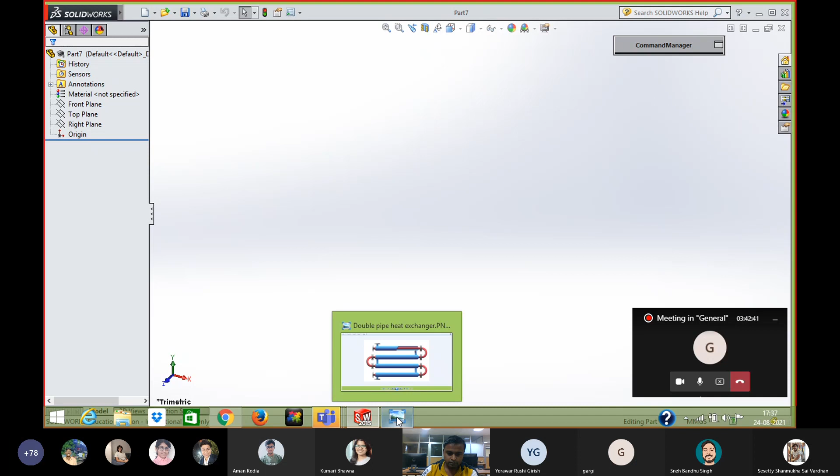So I think this is an example of a double pipe heat exchanger, isn't it? So this is the inner tube, this is the outer tube or shell.

Actually we can't design long pipelines, that's why we had to use a U-type bend so that we can reduce the area, isn't it? Yes sir, okay that's why. So we have to design this outer shell, the inner tube, and the U-turns or connecting part, that is coupling. So we will learn how to make a model of these 3 or 4 parts.

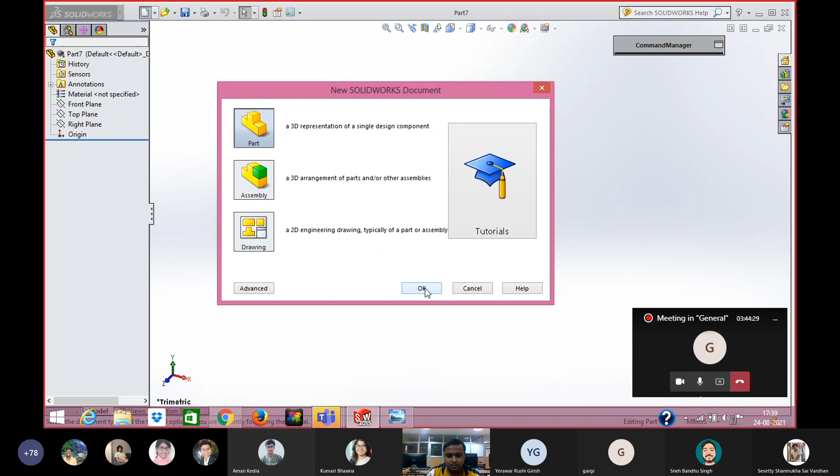From here you can take, for part design you can click on this file page and then select part and OK. So this means you are going to make a part modeling.

Okay, then you have to select a plane. I will select a top plane and then go to the sketch. You just right click on it and then go to the sketch.

So if I want to design a shell, means a cylindrical portion, then what will be its front view and what will be its top view? Anyone can tell? Front view will be a rectangle and the top view will be a circle. You just told the opposite - I mean front view will be a rectangle and top view will be a circle. Okay.

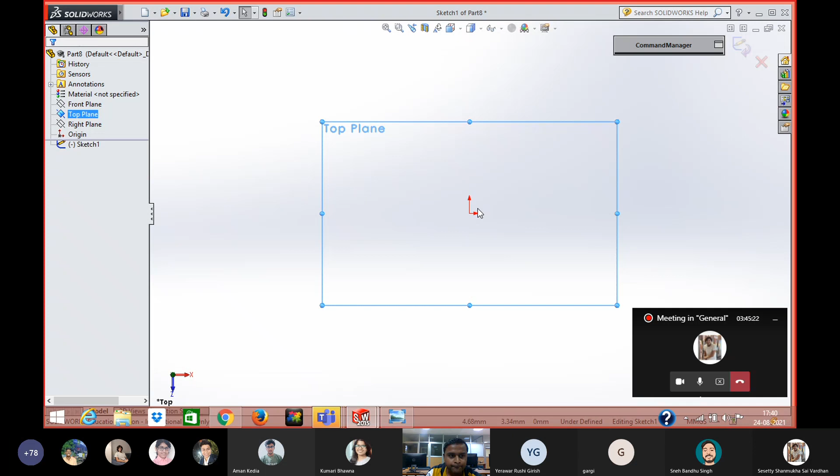So we'll make a circle, or draw a circle. You go to the command manager and then click on the circle, put the center of the circle, and draw it. According to your design of the pipe, you can change the diameter.

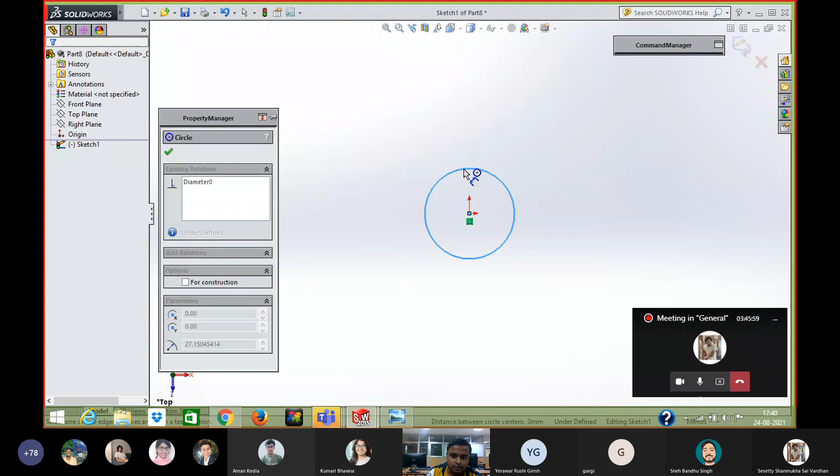Okay, then go to smart dimension. Let's see, here it is showing the radius, so you can also change that. Just go back. Okay, here you can change the radius, or after creating this circle you can also give the other dimension.

Suppose here it's 27.15, you can take it as 30, and then click it. So this is the top view of a cylinder. Then what do we have to do? I have to extrude it. So then just leave this sketch by clicking these options.

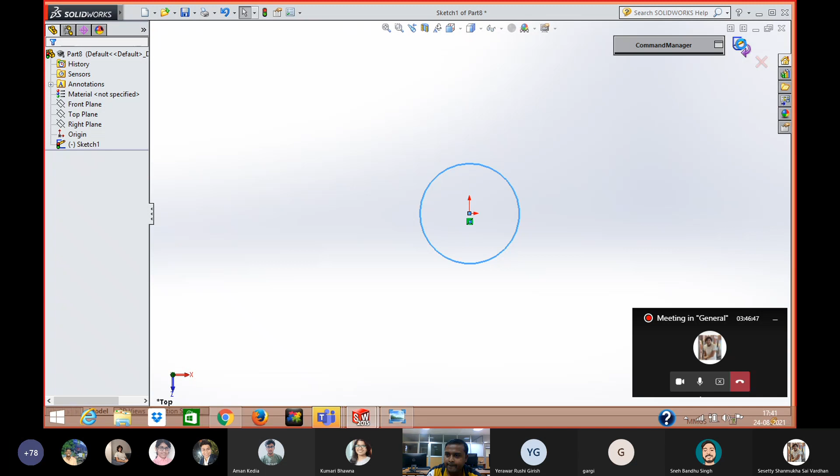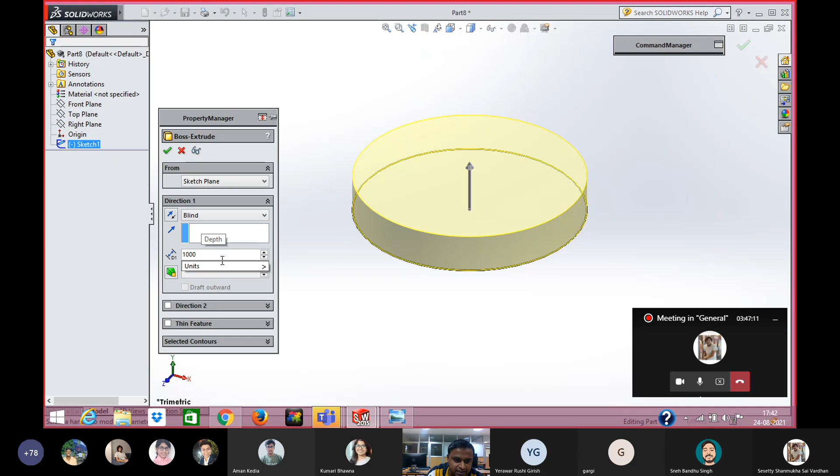And then go to extrude. So whenever you are extruding, it has extruded 10mm. So according to your size of the pipe you can change it. Suppose this is 100 or 1000mm, meaning a 1 meter pipe. So click on it.

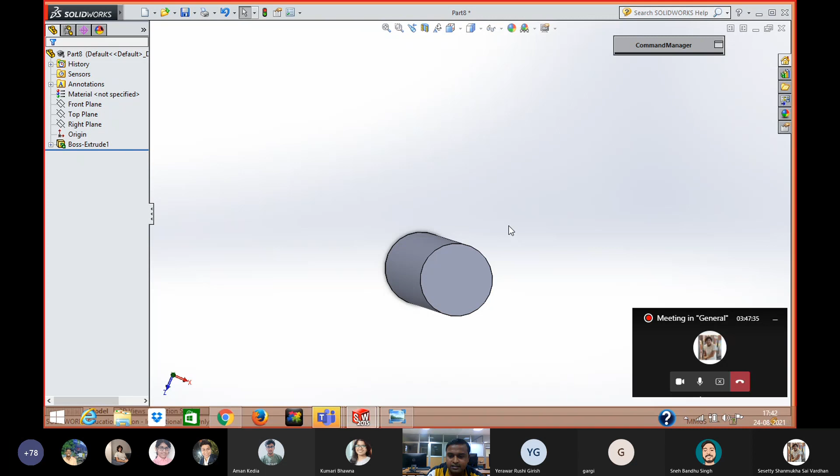So here you see this is a solid, isn't it? This is not a hollow cylinder, this is a solid cylinder. Then how will we make it a hollow cylinder? We will do extrude cut.

Extrude cut where? So then which plane will we select? That circular plane. Okay, then we have to go to the sketch again. Then what will be the thickness of this pipe or cylinder? Accordingly you have to select.

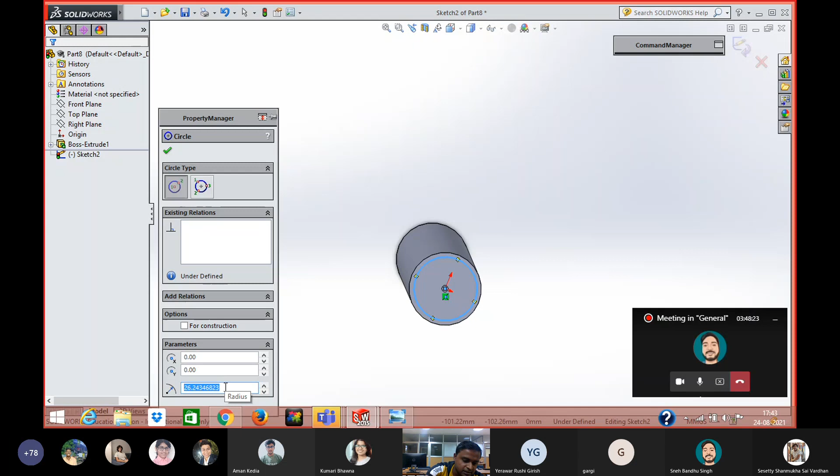Then you leave the sketch and go to extrude cut. So here it is also showing how much we have to extrude cut, so 1000mm, that's why you select them.

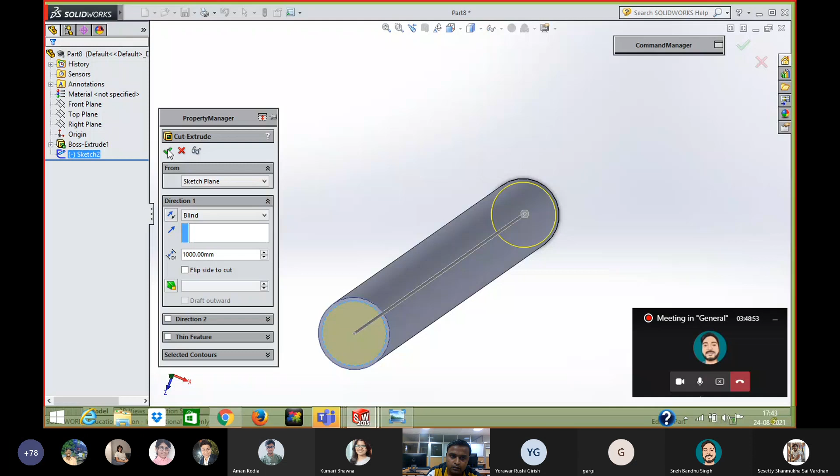So this is a hollow cylinder, isn't it? Yes sir. Then we have already shown that there will be some inlet of that pipe. Okay, how will you create this inlet?

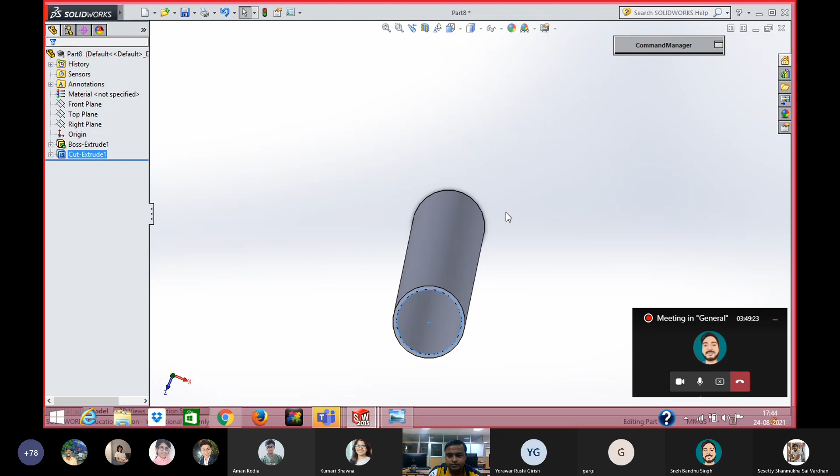Then you have to select another plane on the front side of this cylinder. This is the top plane. Then we have to create an inlet on the front plane of this cylinder, isn't it?

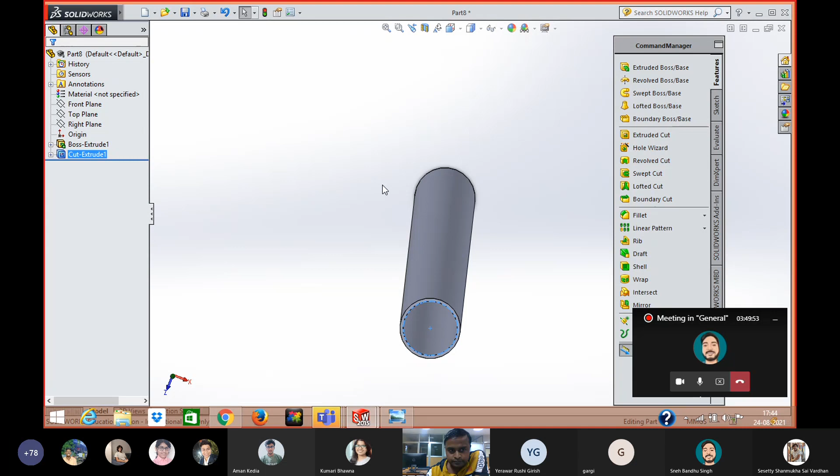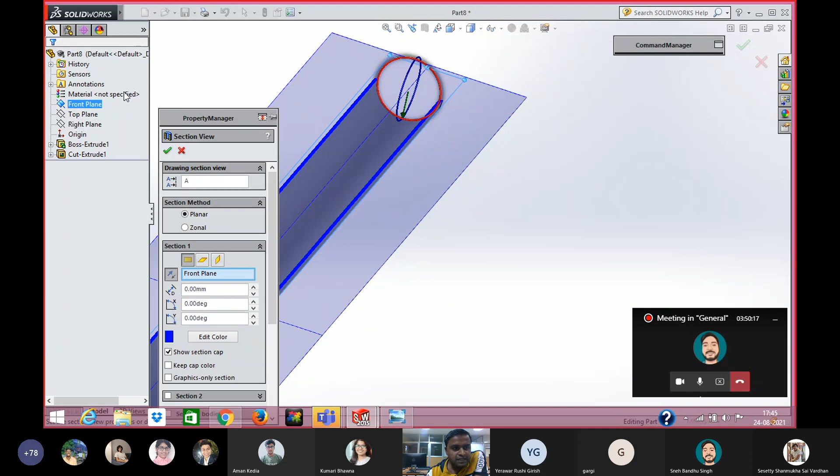Then we have to select a plane. How will you take the new plane to create this inlet? So select a plane, or you can also cut it. In which direction will you cut? See, here it is showing along the length, but you can also change it because we have selected the front plane, that's why it's showing it has been cut along the front side.

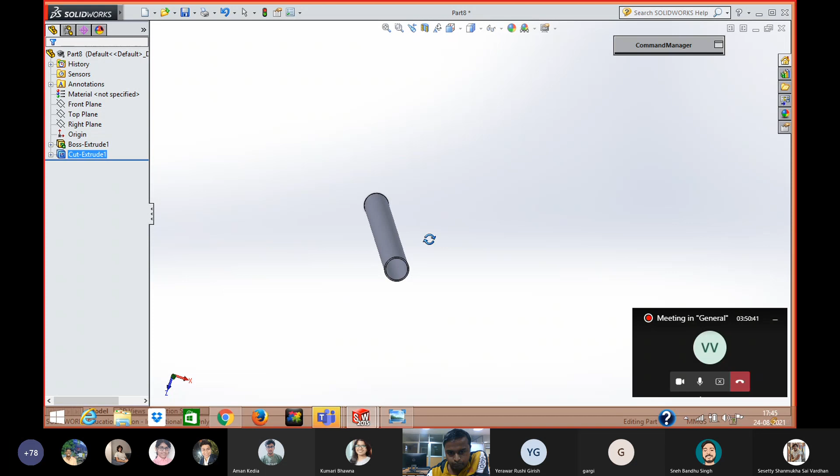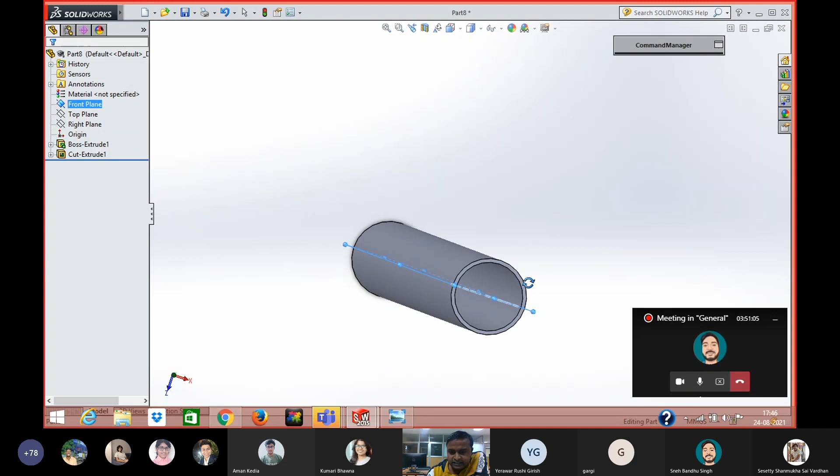Okay, so we'll not select that, we'll draw or create the inlet by another option. This is the top plane, so we can create a front plane. Then we have to just take this front plane onto the upper side of this tube, isn't it? How will we transfer it from the center to its surface?

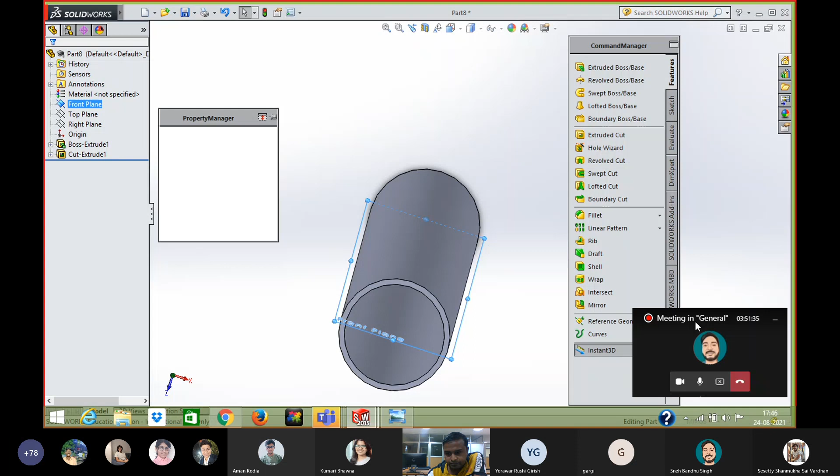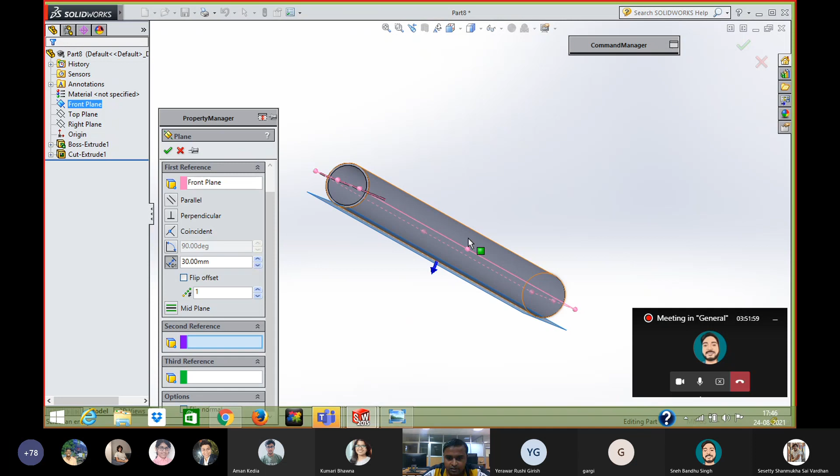You see there is a reference plane. Click on it, take a plane. See, this is the second surface, and you can also take this plane to create the inlet. It's just on the surface of this tube, isn't it? Yes sir.

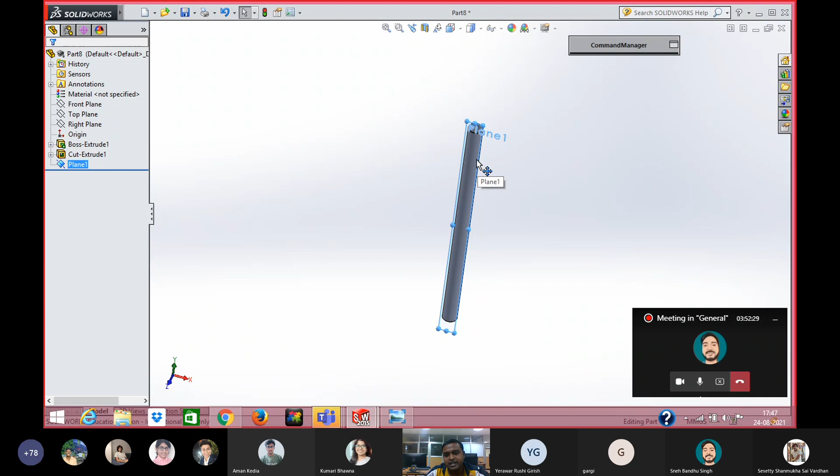So then we select this front plane, and in this direction we have taken - the direction may be changed, but I am not changing the plane. So next go to the sketch. Okay, we have taken this front plane. Then we have to create the inlet just perpendicular to the surface of this tube. Then right click on the front plane and go to its normal direction.

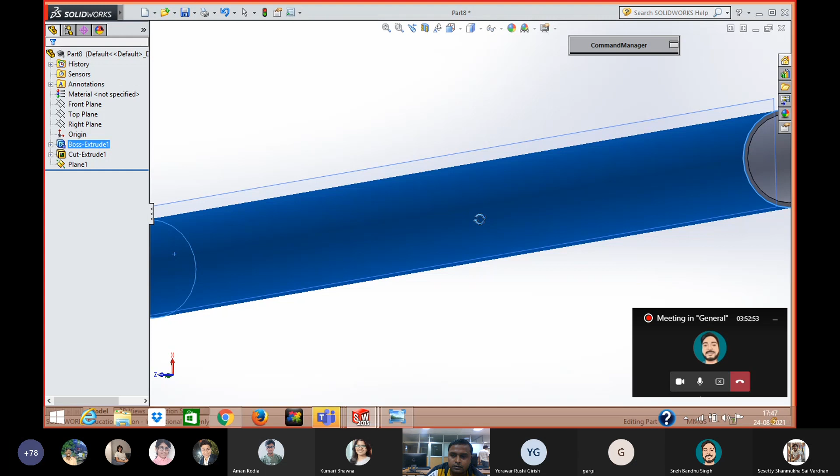Then go to... sorry, I think I have not.

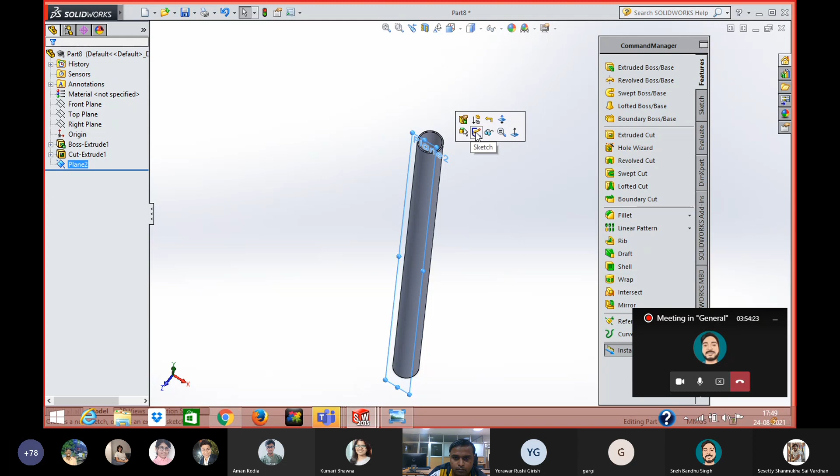Suppose the inlet of this pipe, we can take the radius as 2 mm.

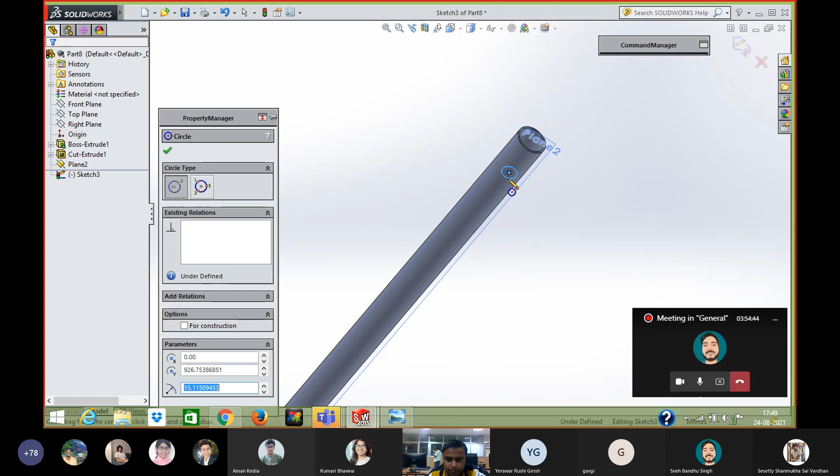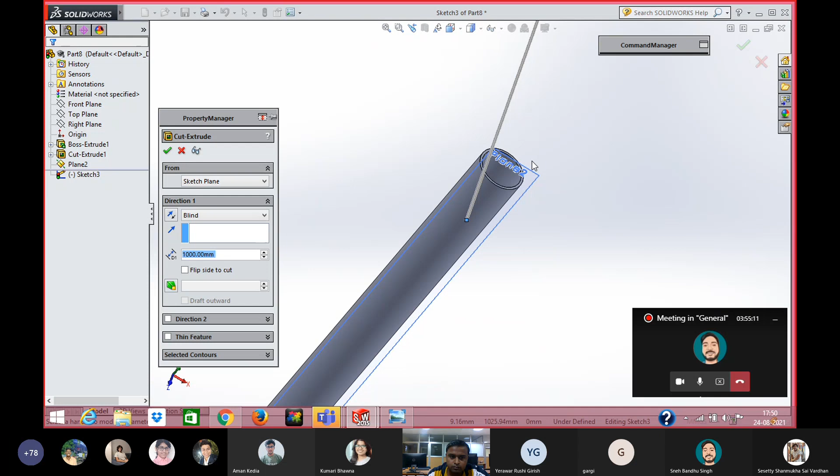Then go to features and do the extrude cut. Here you see it's showing the depth as 1000 mm, but you can also reduce it, suppose to 4 mm.

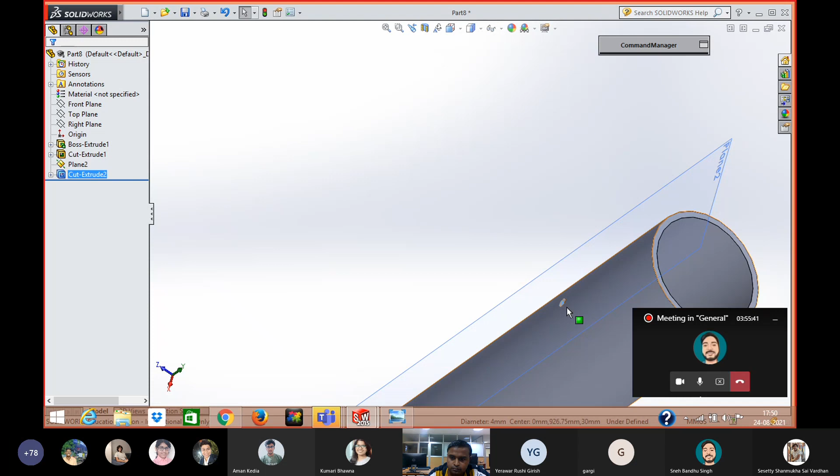Now the hole is created, isn't it? Yes, it's visible. So the main thing is that I am showing how to take a reference plane so that you can design or model any parts, and then assemble with this hole to the other pipes.

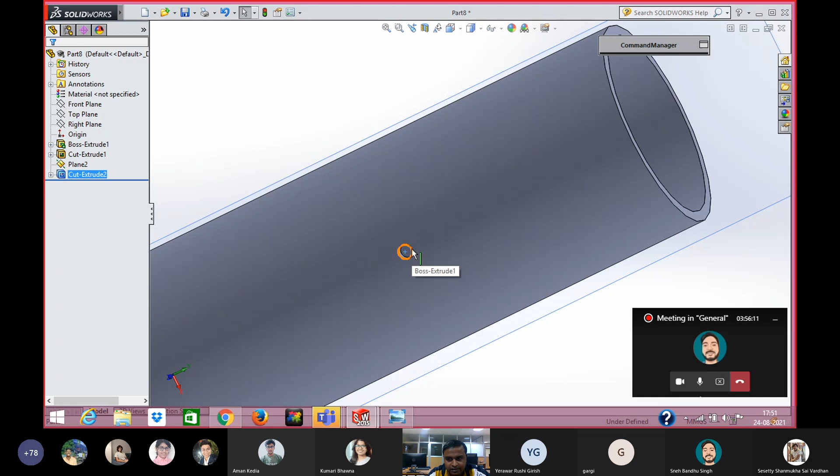When we'll assemble it, we'll select the other pipe. But for the time being, I am just showing that you take a reference plane and you can design or model.

Then we will go to the pipe, the inner pipe. How can we create the inner pipe? By using another option, just like Sweep Boss.

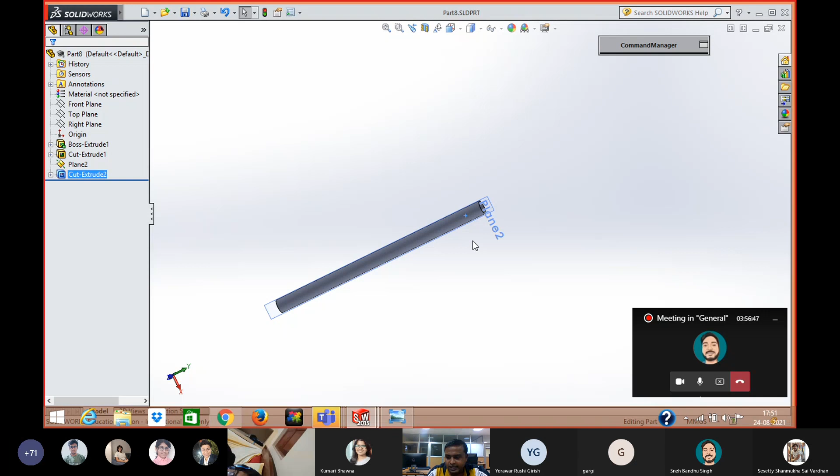So you can save it by giving some name, example part 8. So that's why I'm just saving it as part 8. Then we'll go to our next part drawing, similarly select it, go to new part, and okay.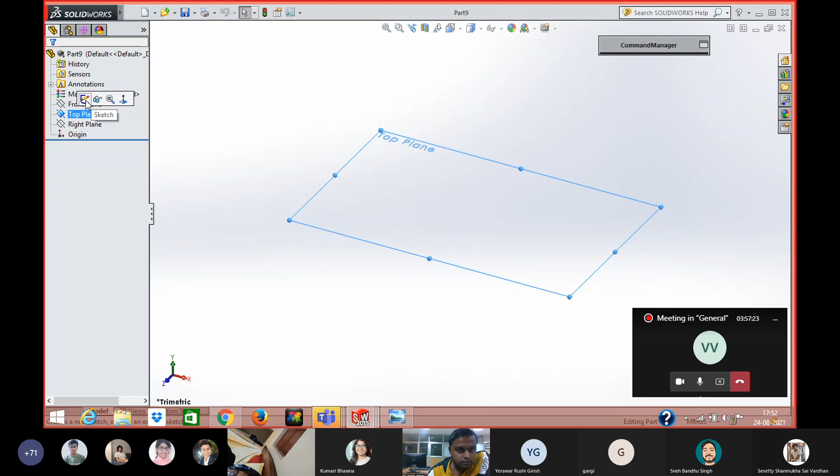Now we'll draw these U-turns. So select similarly a circle.

What is the outer diameter of this U-turn? Then you have to select. Suppose this is 10 mm, the radius is 10 mm.

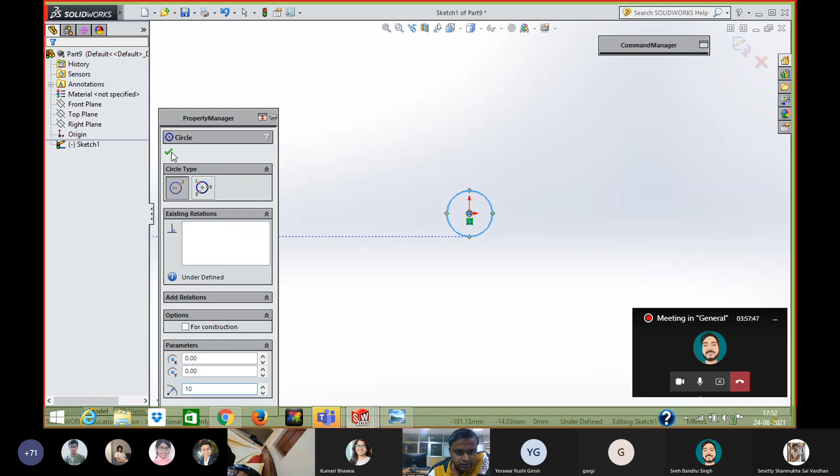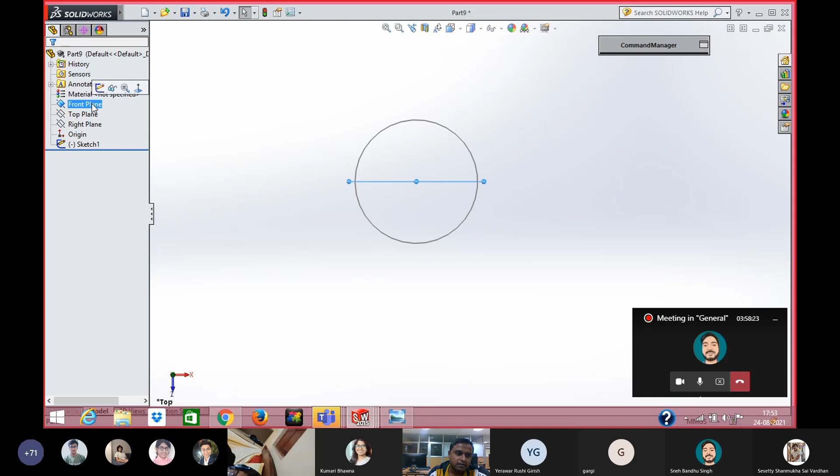Okay, you leave the sketch. Then you have to draw this along the perpendicular of this circle, so you can get the different orientation of a pipe. Suppose the pipe is bending or taking a turn, then you have to create the perpendicular of this top view of the pipe, isn't it?

So as we are drawing the U-turn, we will not show the bend here directly. We'll take a 3-point arc so that we can get the U-type bend.

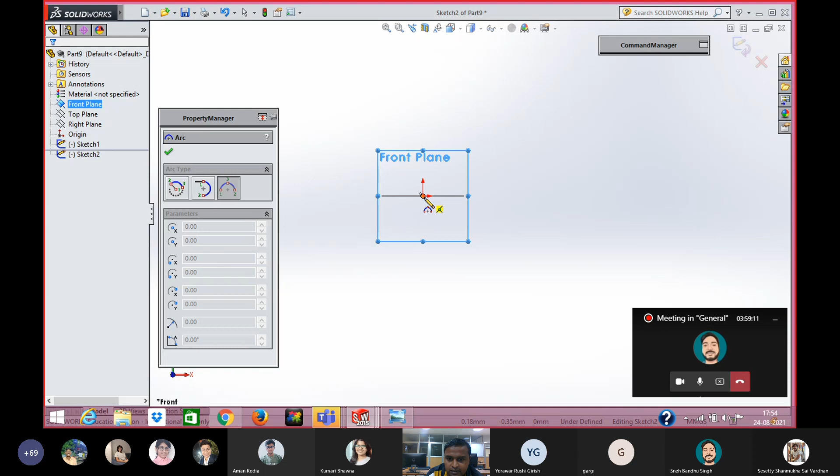So this is the first point, and you can also take it here, this is the second point. Arbitrary, you can change the dimension.

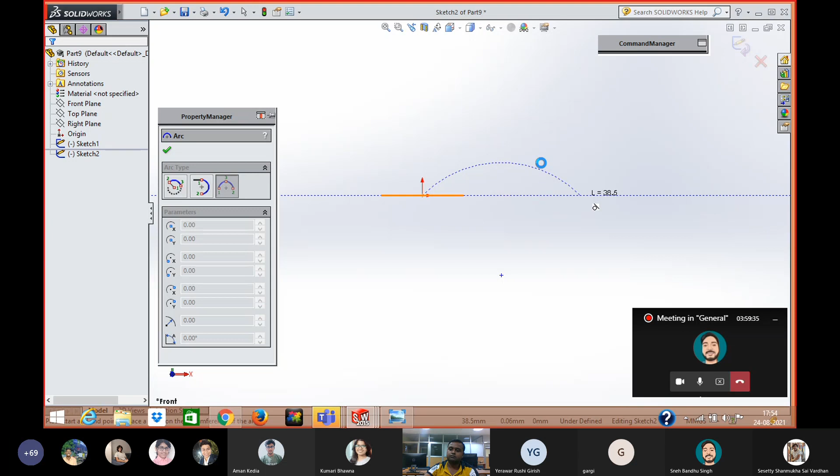Now you can see, it's hanging.

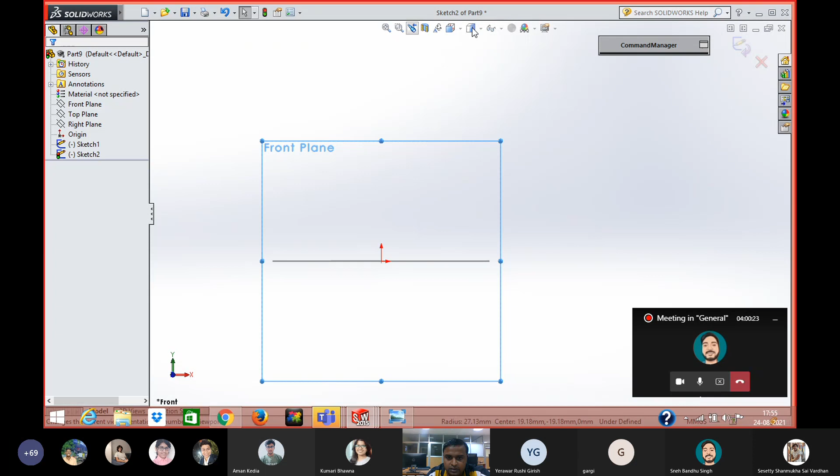Just here, the U-turn is not quite up to the mark, so we can change it. That's why I'm going back to this. So select this 3-point arc.

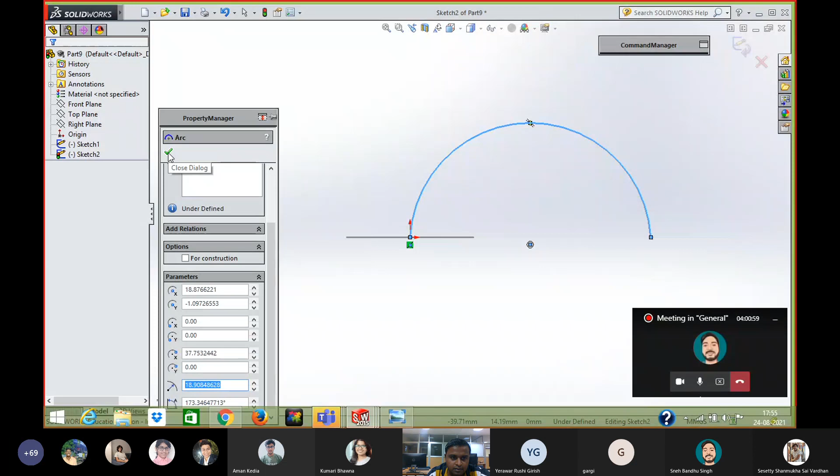This is the first point, suppose this is a second point, and you can also change it. Suppose the U-turn will be like that. You can change the dimension here, the arc dimensions.

Then here you see, in this direction it will be swept. Go to features and go to swept boss.

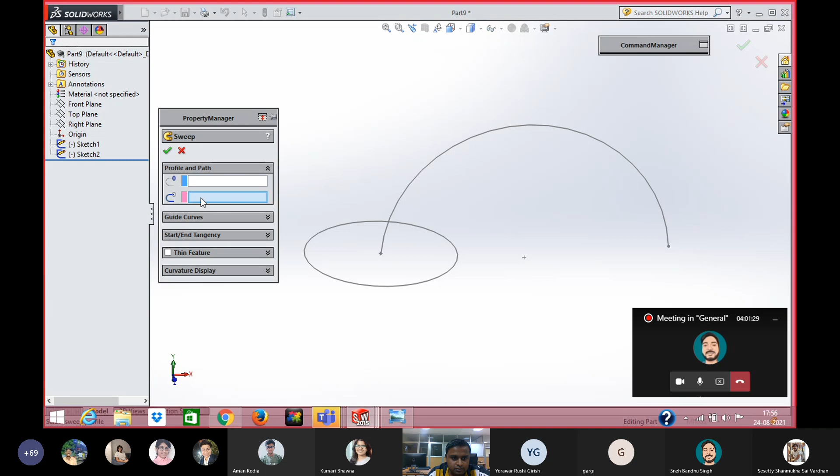So here it is showing the profile path, showing the direction in which we can sweep, and the other profile path shows what will be its shape, just like this is a circle. So then we can select it and sweep it, isn't it?

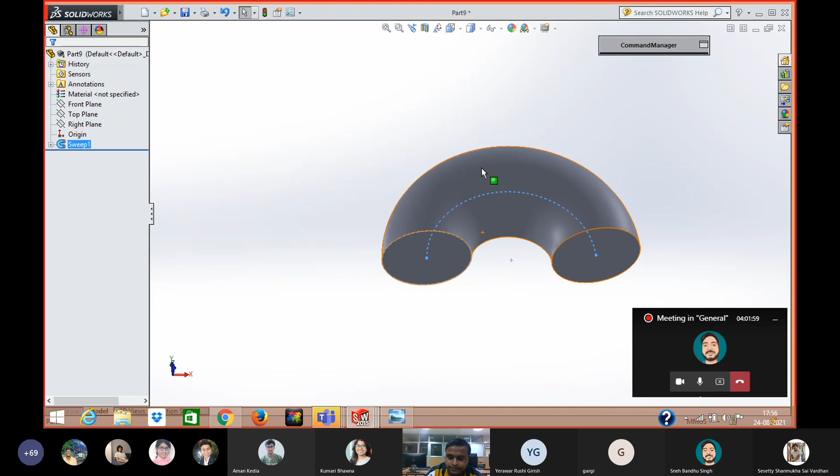So now you can see this is a solid. How will we make a hollow U-turn? There are also options for creating this hollow.

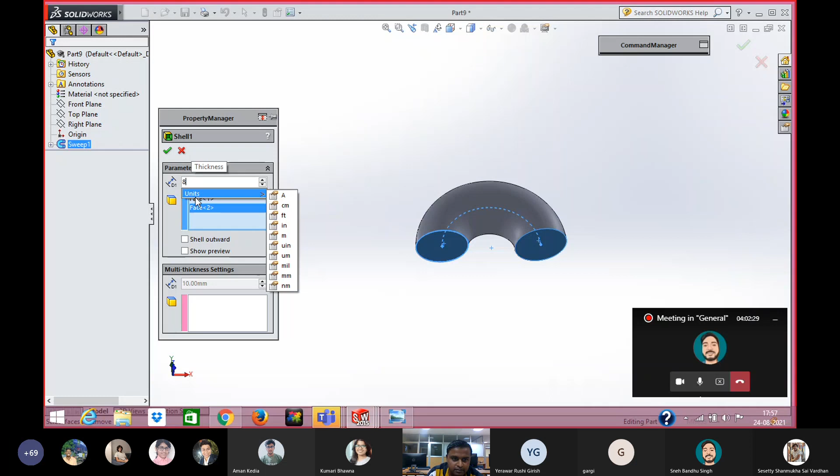Here you see there will be some shell. Click on the shell and select on the faces, and here you can change it. This is 10 mm, you can also change it to 8 mm. Select it.

If you change the thickness, this will be much more. Here I have taken 8 mm, that's why it's showing like this.

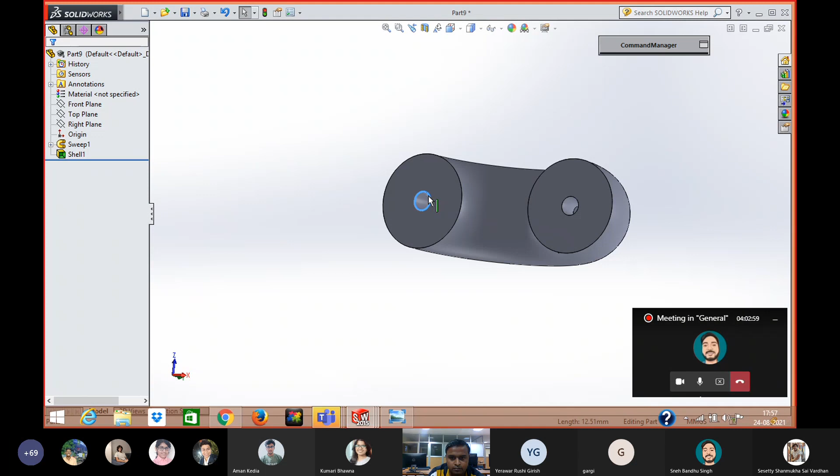So in this double pipe heat exchanger, I have already shown how to make an outer shell, create an inlet, and then a U-turn. Then there's nothing else. I think this coupling you can easily model, and also the inner pipe in a similar way, just like the outer shell, isn't it?

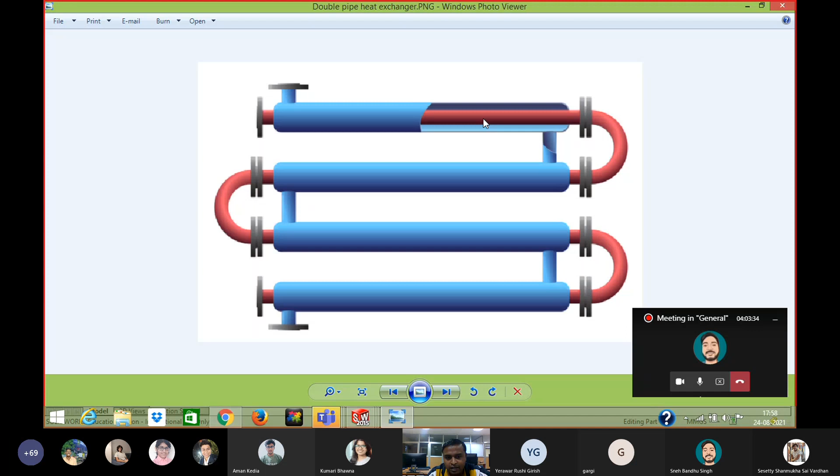Hello, yes sir. So in the next class, I will assemble it and show how to make a double pipe heat exchanger. For the time being, now we can stop this class.

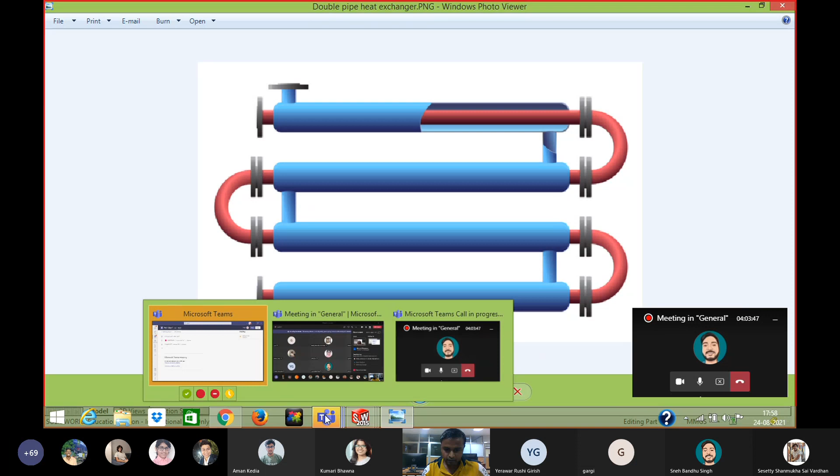What I suggest is, in the next class, the design should be complete. The drawing part, maybe some portion, even if left, after the shell and tube lecture and the problem is given, you will be given some time when you can complete the double pipe exchanger drawing, submit it, and then concentrate on the shell and tube heat exchanger design problem.

Is it fine? Yes, ma'am. Thank you, ma'am. But definitely the design part has to be completed so that some doubts of the drawing can be clarified after that. Is it fine, Professor Mondal?